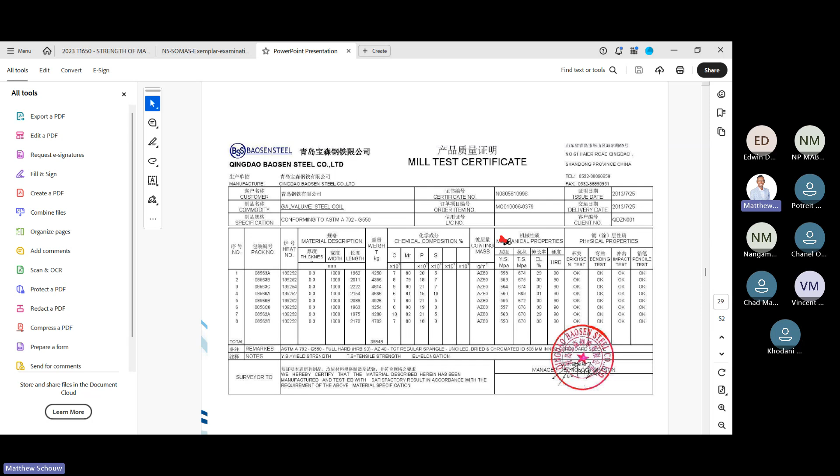So I'm just gonna quickly start off with shear, and then we're gonna commence with the tensile testing, which is a big section — a lot of free marks. So again, shear — I didn't mention to you what it is.

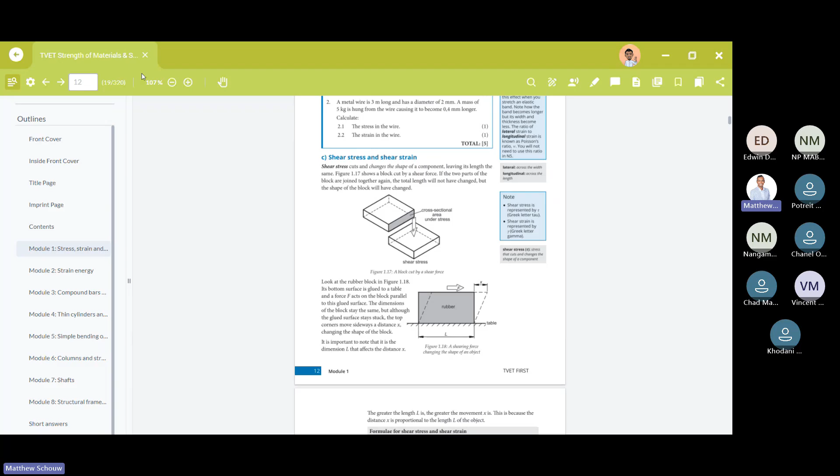It's like tearing a page, where we have a parallel force. And guys, what is the most important part? In your direct stress, you're looking at the area perpendicular, right? But in this case, you're looking at the area parallel to the force applied. Okay, that's very important with shear.

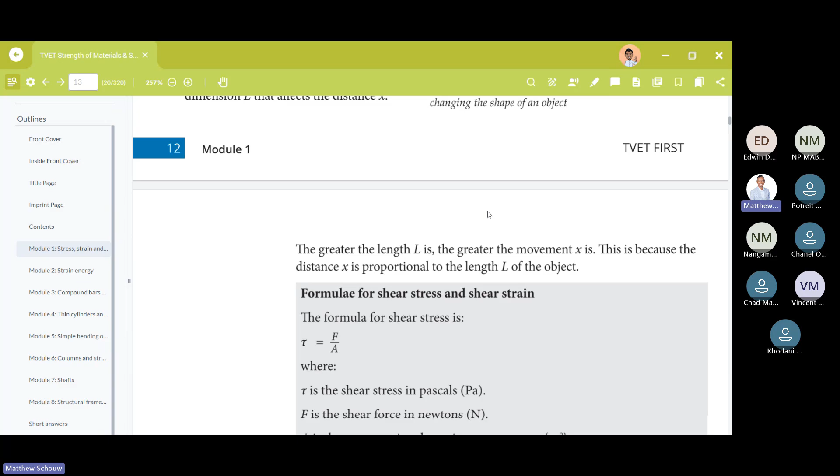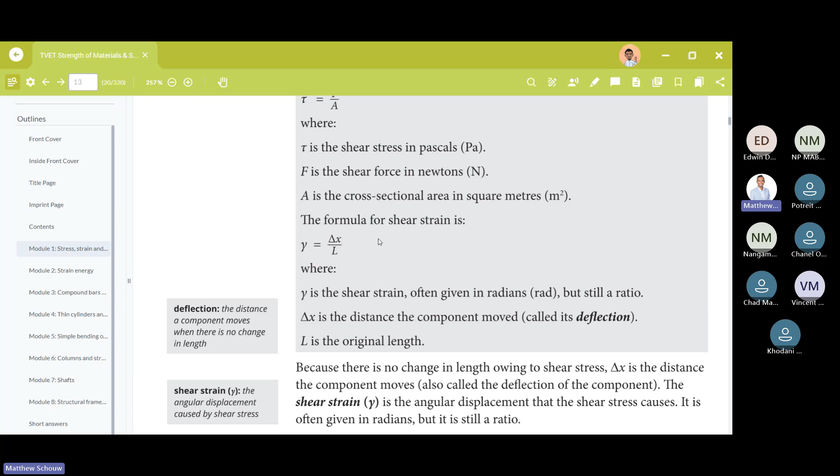This doesn't really come up a lot in the test, however it does come, right? It has exactly a similar relationship to the previous one, but instead of using sigma, we use tau for the shear stress — that fancy T, force over area. And then we also have our shear strain as well. Again, if you divide your shear stress by your shear strain, you get something called the shear modulus, or modulus of rigidity, which is a similar property to your elastic modulus.

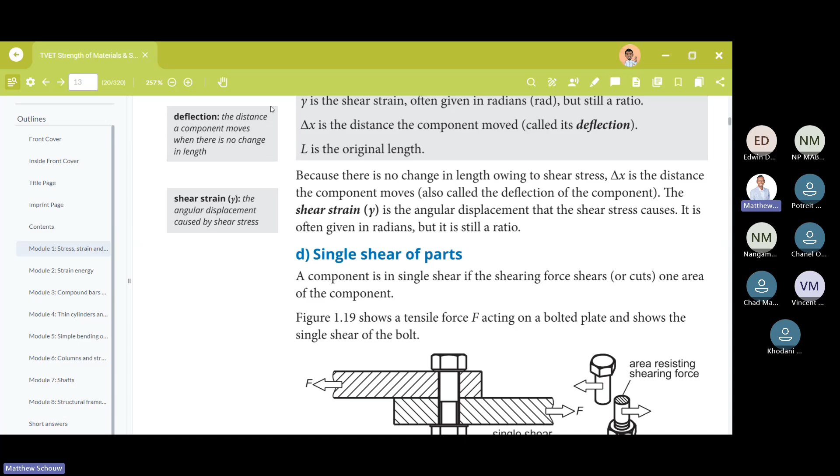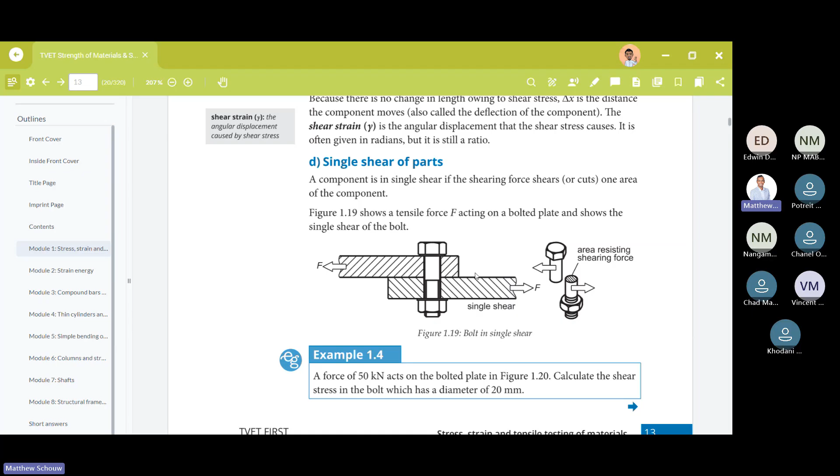Let's quickly look at an illustration of shear, since this tends to happen a lot. Let's look at example 1.4. I'll read the example, point to the sketch, then we'll solve it. It states we have a force of 50 kilonewtons acting on a bolted plate in figure 1.20, essentially the same as this one, which looks like a rivet. It asks you to calculate the shear stress in the bolt with a diameter of 20 millimeters.

So I'm just going to quickly prepare my whiteboard, warm up with these questions, and then we'll begin with the stuff in question.

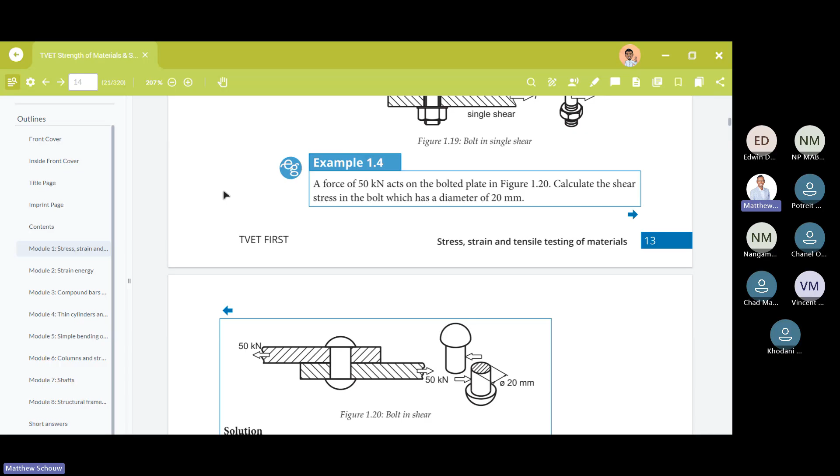So guys, I want to be clear: when it's shear, you use the area parallel to the force, whereas for direct stress, you use the area perpendicular. Very important. Let me paste the question. Please, I want to explain so you don't get confused between perpendicular and parallel.

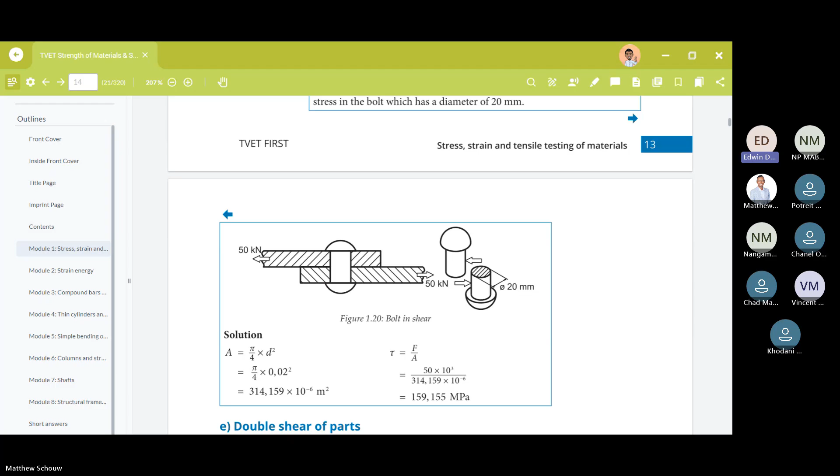So when I say it, what do you think I mean? Explain it to me. For parallel, I think of my back against the wall - parallel with the wall. Perpendicular would be at 90 degrees, like the floor I'm standing on. So my question is, when is it perpendicular or parallel? Is it when the force is being pulled in a certain direction, or how does it work? Yes, that's what I'm trying to say, that's where I get confused.

So when we're talking about direct stress - force over area - you know this, right? Shear stress and direct stress are not the same thing. With direct stress we have either tensile or compressive. I'm explaining the concept here before we get on. Is that fine with everyone? You understand what these two are, right?

You can say yes, Edwin. Tensile and compressive, right? When you're dealing with direct stress, you use the area perpendicular in this case. Are you with me? In this other case, that's shear, and you use the area parallel. Are you with me now? You see the difference in the areas?

Yes. So let me explain - if I had a setup like this, and the loading was like this, ignore this question for now. This area over here is parallel to this force. Can you see? This round section over here, what they're mentioning - you see that? So we'll use this area, pi over 4 d squared.

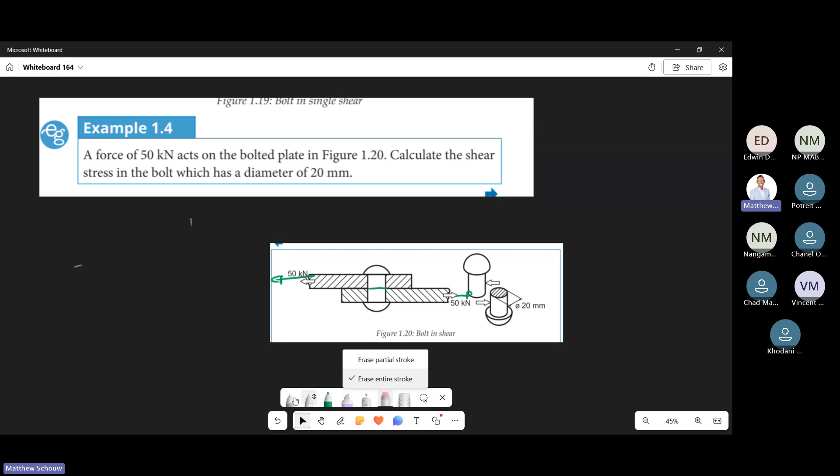So guys, just a quick one - we'll talk about the others now. They ask us to compute the shear stress. We know shear equals force over area - I normally know it as V over A, but you can call it F over A. We know it's 50 kilonewtons. I can show you so much on this, but there's not enough time to show where it all fits in. So it's pi over 4, and again the reason we use pi over 4 d squared is because that area is parallel to that - it's essentially breaking. So that'll be 0.02 squared, and you'll get our answer.

Okay, just a warm up, eh? We're not getting to the meat and the bones - the meat and the potatoes, sorry. Can we all just quickly work that out? What is that answer? Just a warm up. Some people are rusty.

So now what did you get there? Oh, Vincent?

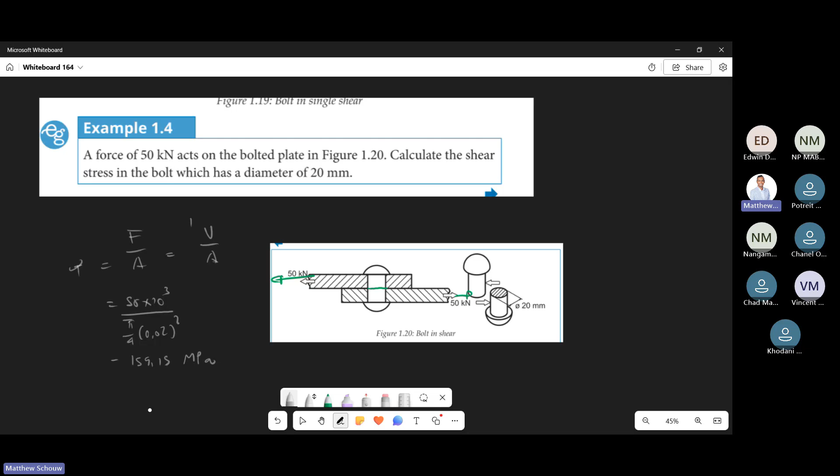Just a warm-up problem. Again, what's important here is the area, right? You'll see as you move along these problems where this is important. Okay, I hope everyone got that.

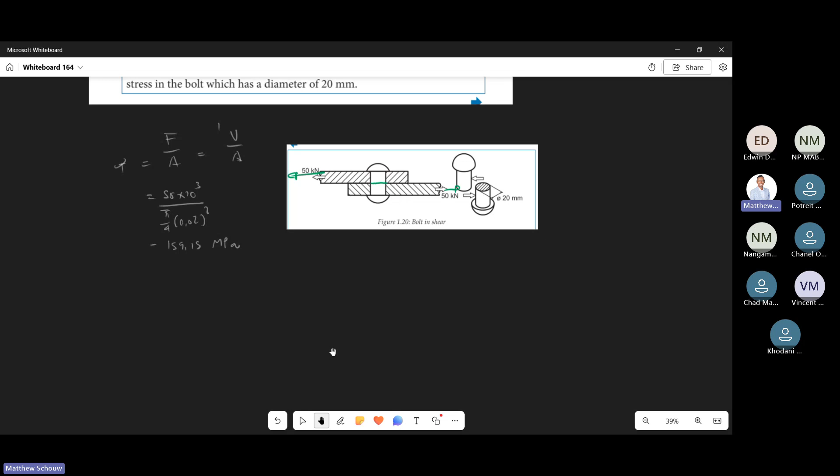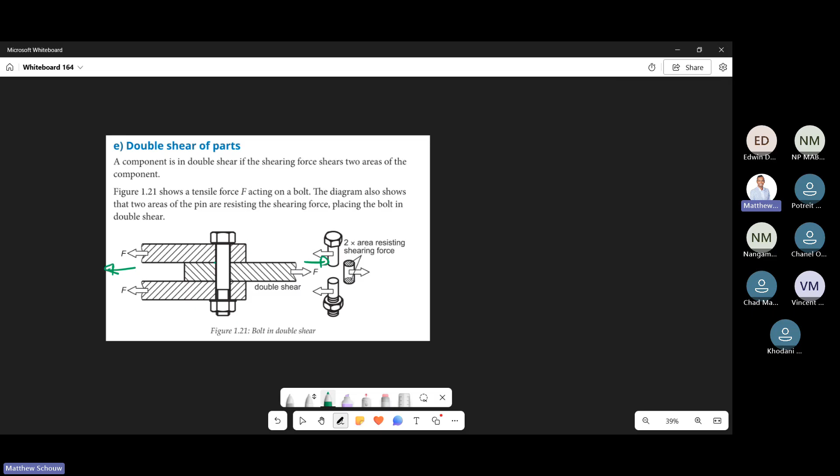So I wanted to quickly go on to the concept of double shear now. So that was single shear, meaning it broke in one area, and now we move on to double shear. Double shear is basically all the same stuff, but in this scenario what's important is that it's shearing at two different sections. So here we've got one force, or essentially two forces being applied that way, and another force being applied that way, and it's going to shear over here and shear over there.

What we essentially do is just take the area and times it by the number of areas it breaks. This is a lot different from when you're doing a tensile test, where you don't multiply the area by the number it breaks. This doesn't happen frequently, but it's worthwhile sharing.

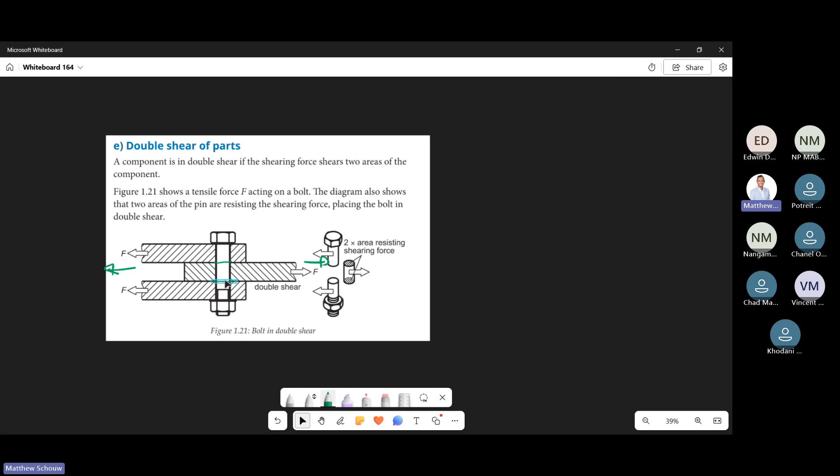So in this case, it breaks over here, and it breaks over there. So therefore, it's going to be 2 times the area. So let me pull up another problem quickly using a knuckle joint.

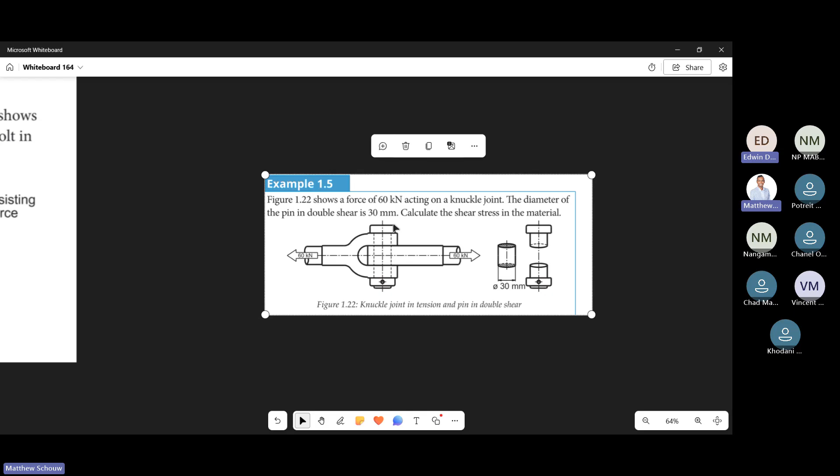Does anyone know what a knuckle joint is? No one? Sorry, apologies, I would ask a lot of questions. So area is times 2, is that what you're saying?

Yes, for double shear. For instance, the questions don't tell you directly, right? So they give you something like this: you apply the 60 kilonewton load, and they'll ask you to calculate the shear stress of the material. Now, if you're inexperienced, you probably just take the one area.

So first of all, you check your force. That's two forces going that way. And if that's going to break, they normally state that the pin is in double shear anyway, so it gives you a hint to what's happening. But if that breaks, it'll break over there, and it'll break over there. Hence it's in double shear.

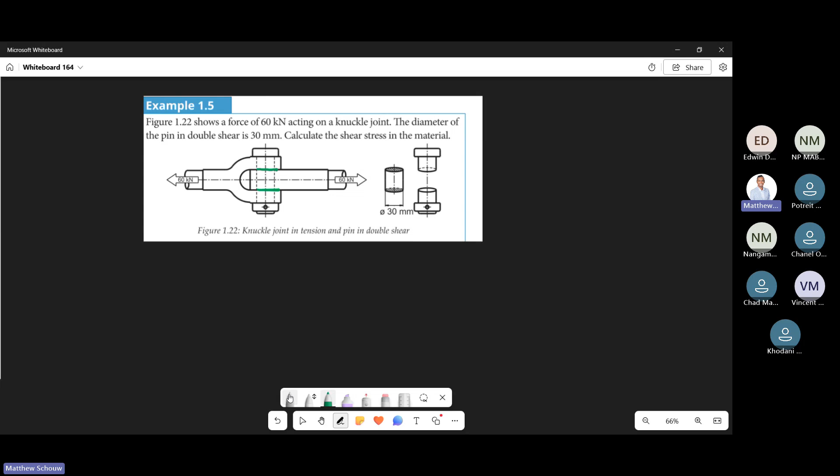So therefore it's the same thing, but 2 times now in terms of the area. So you go shear equals force over area, times 2. So in this case, it's 60 kilonewtons, and then you're basically going to say 2 times pi over 4. Again, these are very elementary problems.

Times 0.03 squared. And then you basically find the shear stress of this particular joint, so when you're designing, you know which kind of material to use. It must be within that limit.

Anyway, so there should be a quick calculation. Can you guys quickly do it? Shear, there's a whole big thing on shear, by the way. It's just that it's not the core focus of this particular course, you know what I mean? I can show you where it's very important, but it's just not the core focus here.

So again, for double shear, the concept is just to be cognizant of those things. 42.4, 100%, yeah, that's perfectly fine. That's the shear stress in the joint. 42.4 MPa. Okay, cool, that's perfectly fine. That's the shear stress which it's going to experience.

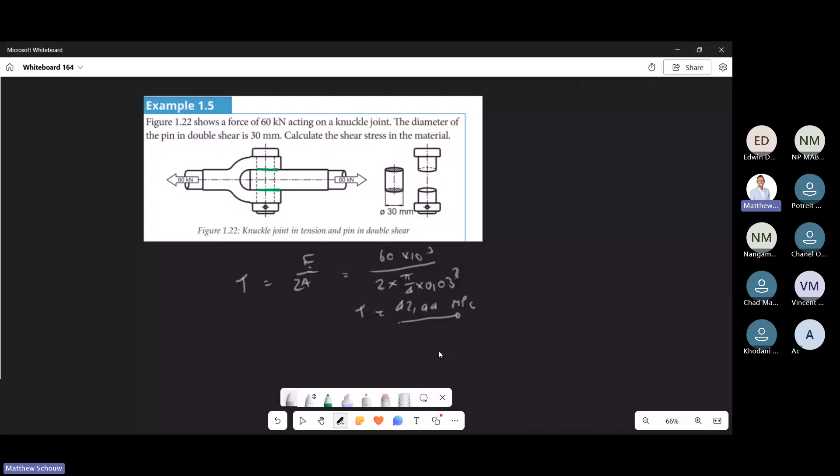Yeah, you know, I can explain that particular thing. But that's enough for shear. Just the key point: area parallel, right? Okay, so I'm gonna move along. So now I want to come up to testing of materials. Now that's what I want to do. Okay.

Yeah. So unfortunately for you, I've done this. I've worked with this at a company called Gascon. We built pressure vessels, and I tested a shit ton of materials. Excuse my lack of language for the better word.

Anyway, so what we have with the tensile test. I'm not sure if anyone has seen this before. Has anyone seen this before? Tensile test. Who has any experience with tensile test or tensile property? So now, Vincent, Edwin. Nothing my side. Nothing your side? Okay, okay. Anyone?

There's actually a lab called 180 degrees, which actually does this. They do this type of testing. Anyone? Hey, man. No one. Okay, right. So what happens here?

Okay. So I do recommend watching the video. I'm sharing my slides again. And then there's two videos I sent you explaining this. And I can send you a video of what an actual tensile test looks like. So nevertheless, tensile test, what we typically have, let's see what it looks like.

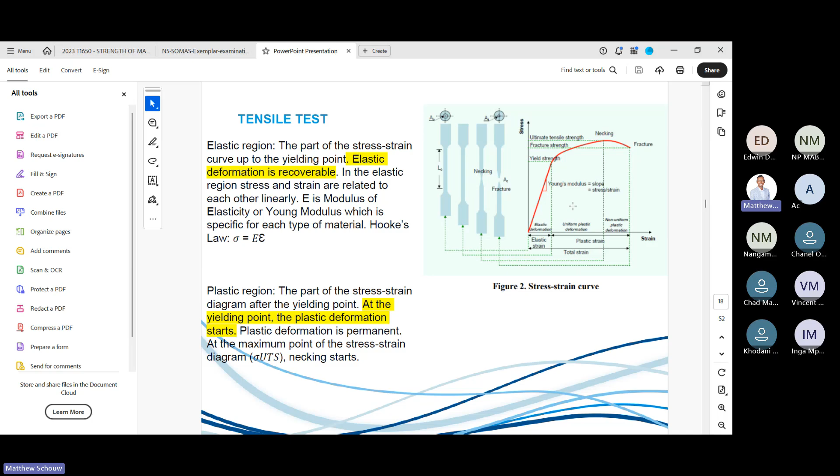Again, elastic deformation means whatever load is here, it can return to its original shape. Any load above that, which is essentially the plastic part, it cannot return. So this is what a typical tensile test or tensile graph looks like.

Talking about the elastic modulus, I did mention I'll get back to this. So just reading off here, it states that the elastic modulus, E, is a measure of the stiffness of a material determined by the slope of the straight-line portion of the stress and strain curve, as I mentioned to you. So again, the elastic modulus is essentially, quote unquote, the stiffness of a material.

So what they say there, a material having a steeper slope on the stress and strain curve will be stiffer and will deform less under load. And where it's less steep, it will be less stiff. So for instance, if you look at steel, that's why we actually use steel, because it's more stiff. It can elastically deform as compared to the other types of material.

And what they're saying here, it can be seen that if two otherwise identical parts are made of steel and aluminium respectively, the aluminium part would deform about 3 times as much as the steel, even though subjected to the same load. So that's what your E value actually is, your elastic modulus.

All right, and then just to end off we'll come back to this. So, who's coming in and out? Okay, go back to this. Just want to show you some stuff.

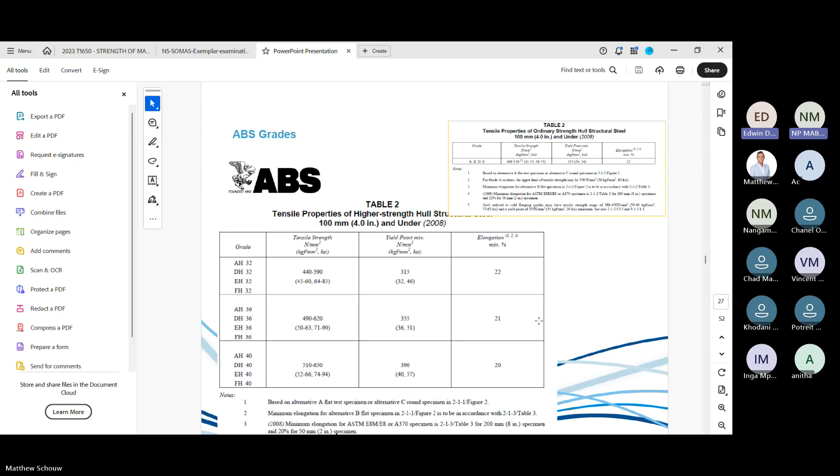Is everyone still following me? Yes, sir. Okay, thanks, man. I'm talking a lot here. Following. Okay, thanks.

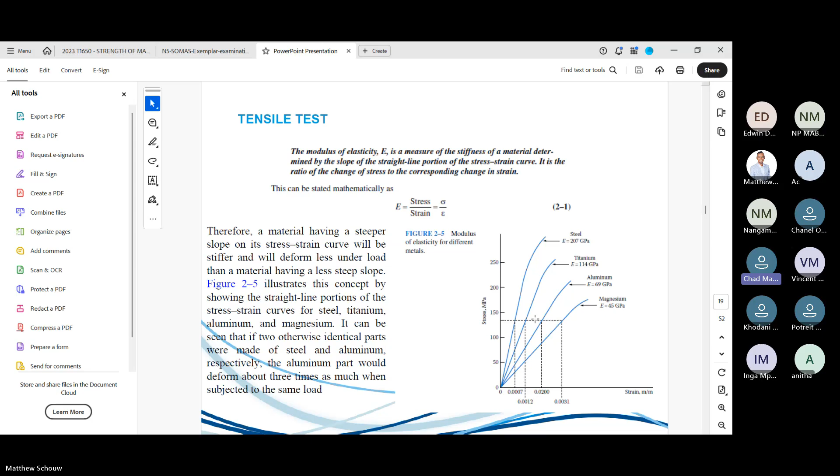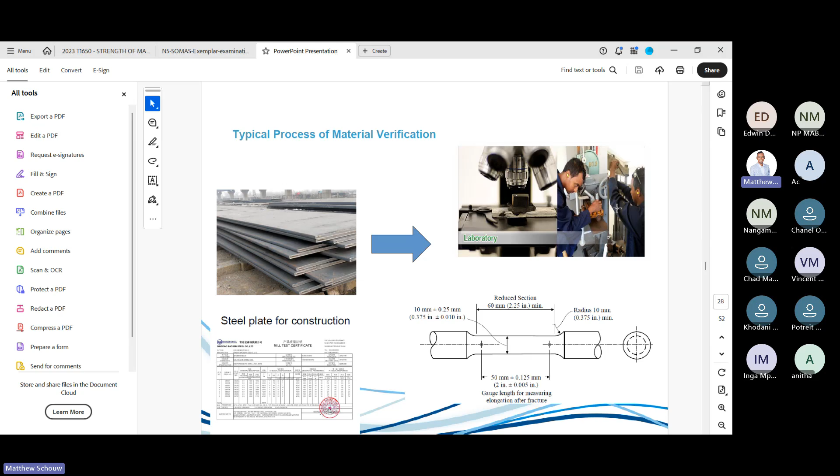So that's me. It's a bit of an old-school machine. You clamp it, and then it just runs, and it generates this graph for you in real time, this graph which I mentioned to you over here. So you actually see the graph go. I was using old graph paper with a pencil at that machine. There are a lot of more modern machines.

And I was working with the machinists, the guys doing welding. But anyway, I can talk about this for legit 4 hours.

But anyway, based on this graph, we need to determine certain values. Inga, yes.

The hand was up, eh? Not sure if you... Okay. Can you hear me now? Yes, I can hear you, Chief. Loud and clear. Hello? Yeah, I can hear you.

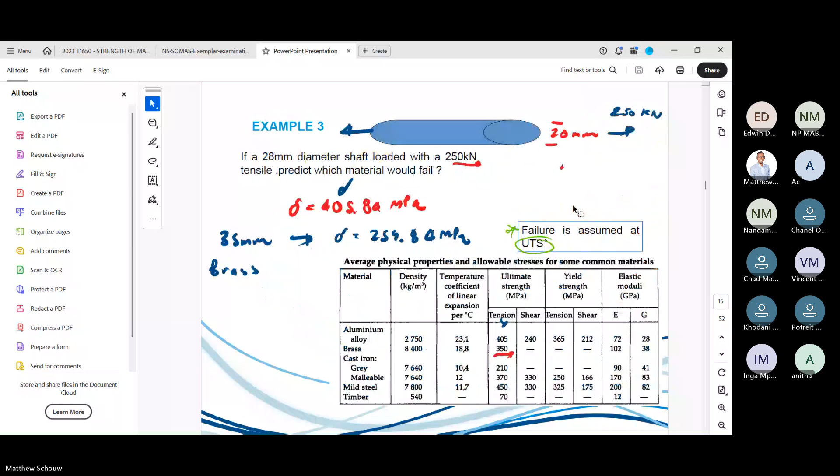So on this graph here, we must now calculate certain stresses along the graph. So basically, there are a few stresses. Let me use your N5 textbooks rather, just for uniformity purposes. And this is what I legit did. I first thought I'd never get a chance to actually do it, but I somehow ended up in that field where it was just an Excel spreadsheet. I was doing it most of the time because you just had to program it, write the formulas out once.

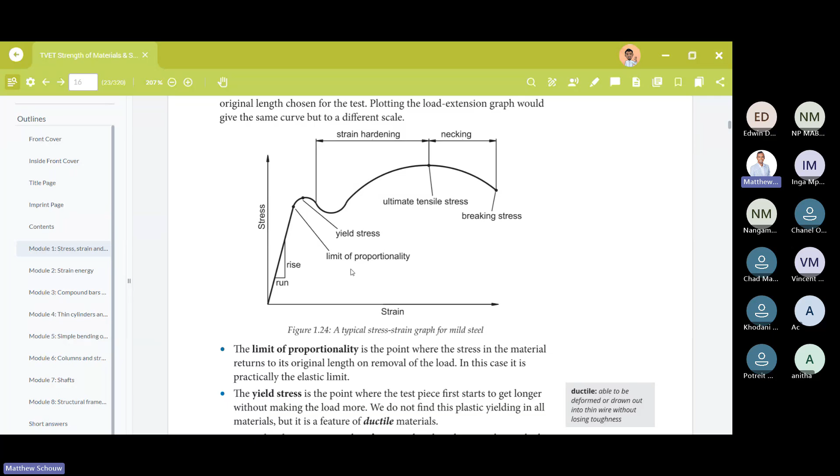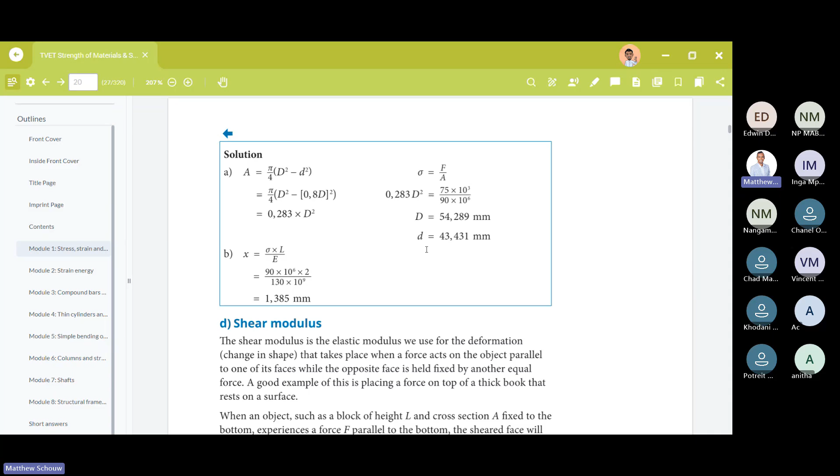Okay, so this is what it looks like again. This is exactly it. I think some of the books require you to understand each individual part, so I'm sure you guys can go over that. And then I want us to look at a few parameters on this thing. I don't particularly like the way they've structured it here. Okay, so let me just go back to my thing rather. It's just gonna be easier. It's all the same really.

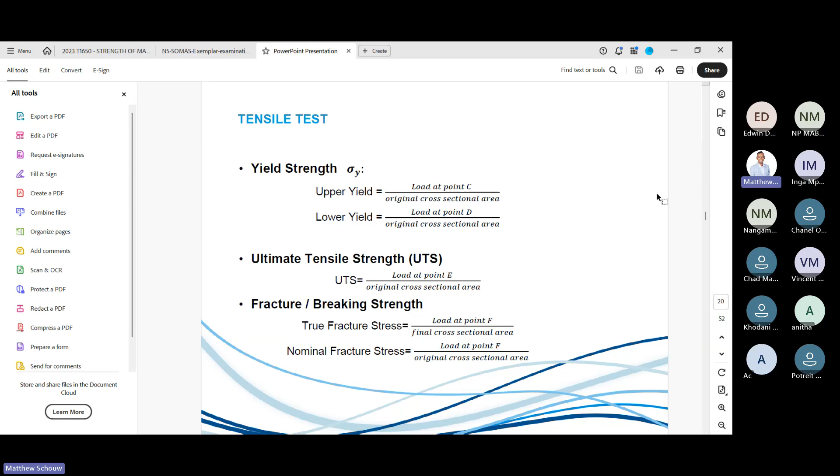So using that graph, to find your yield strength, sometimes it's an upper or lower yield. Typically, they'll give you a value. And then you just take the load divided by the area. It's all force over area. For your UTS, you take the load at point E, which was that maximum load Inga was talking about, and divide that by area. Don't worry, we'll be doing 2 examples of this. We look at the percentage elongation. This is a very important metric. It's just like the strain.

So I'll have a specimen like this. I'll put up 2 gauge marks using a center punch and a hammer, right? Vernier, make 2 marks on the one side, center punch, and then I put that in the machine, it breaks, and afterwards I put it back together and measure the length. So L0 would typically be 50 mil. And afterwards it'll be LF, the final length. So I take the final length minus the initial length, which is the change in length, divided by L0, the original length, times 100, to get the percentage elongation. It's just like the strain.

And then you have a percentage reduction of area. This parameter is important, especially for through thickness. If you have a very thick plate, we typically use this. In this case, we measure the area before at that point, and then measure the area afterwards. That's A1 minus A2, divided by the initial area, times 100, and you get it in percent. But you can also just remove all the pi over 4s, because that's common. You have D1 squared minus D2 squared, which is initial minus final, divided by initial squared, times 100.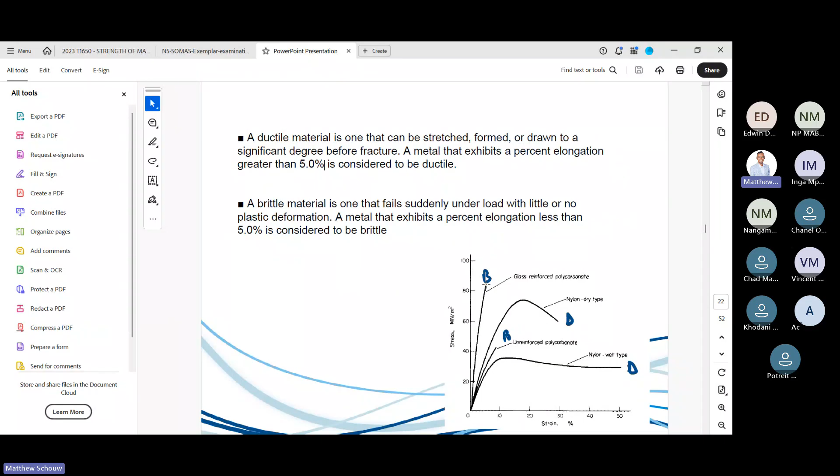A brittle material suddenly fails under load. You load it up, it doesn't deform, it immediately breaks once it reaches UTS. So there's no yield point, it just completely fractures. For a layman, with a ductile material, when the structure collapses, we have time to scream before it breaks. Whereas brittle, it loads up, breaks immediately, there's no time to scream, you're basically dead. So I hope you get the difference. And what these parameters do is quantify it. They tell you how much ductility there is.

All right. So without further ado, let's solve our first tensile test question. So this one, should I use the book? I have questions prepared. I'm sure you saw the Google Classroom over there.

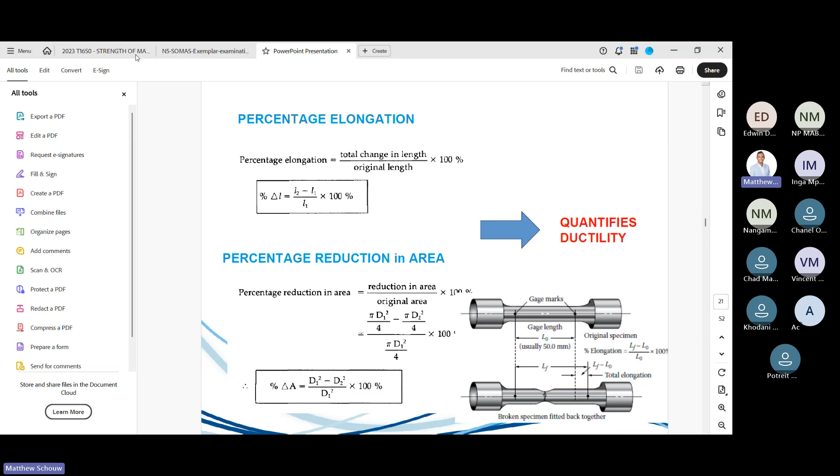I want to use, okay, let me use that one over there. You should find it there. Just get the thing quickly. And we're going to be basically doing two of these questions over here. And guys, for your upcoming test, ensure you are able to do this without fail.

So session 2, okay? Session 2. Okay, cool. Just close this on session 1. Yeah. Over here, okay. Okay, so this is from the Wickens textbook. Make sure you do this. It's a very popular question in the

past papers. Share, please. Yeah, I'm sharing it now. Yeah, sorry, dude. I just couldn't see your screen. Okay, now I'm still sharing.

Okay, so here we go. So we're gonna do two of these. One I'm gonna talk mostly through, and then the other one I want you guys to do. Okay. I think I might just pull up a random past paper while you guys are busy with this. So here we have. So the test has been done, right? And we have all of the information, the data.

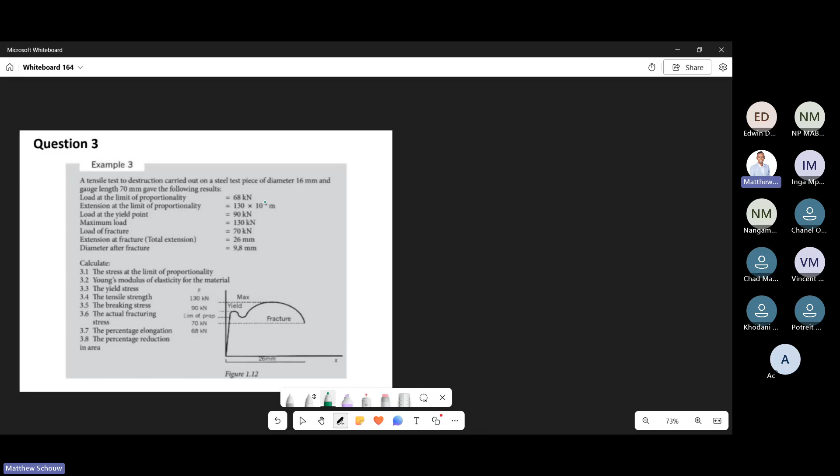So it says a tensile test to destruction carried out on a steel test piece of diameter 16 millimeters and a gauge length of 70 millimeters gave the following results. Key point here, initial conditions are given here, right? 16 mil, and then your 70 mil. Okay. The load at proportionality is 68 kilonewtons. So remember, that's all over here.

Your load at your yield point, which is just on there, right? Your maximum load, 130, which is there. Load at fracture, it's over there. And your extension at fracture, that's the total length after it's been broken. So basically that's extension. And then you have your diameter after fracture. So it is reduced from 16 to 9.8. So these are the following things asked for.

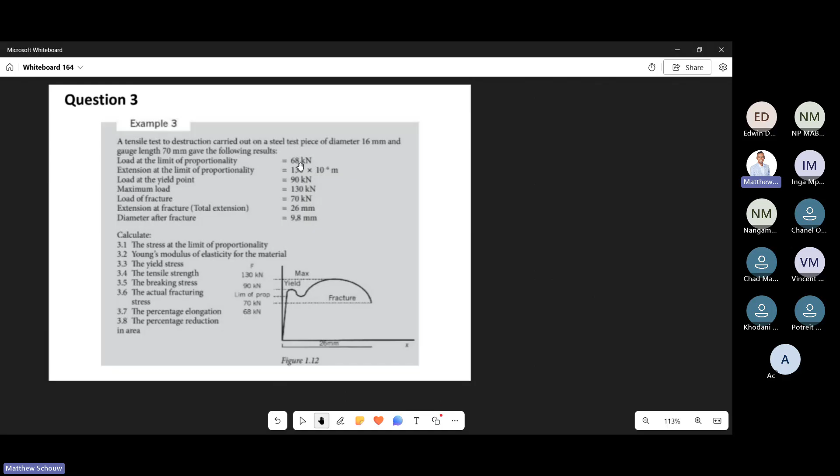Okay. So they're all basically the same formulas, but you must just know which values to use based on the text given. So 3.1 says the stress at the limit of proportionality, which is this limit over here, right? And remember, this is where we find our elastic modulus. So we take our load at the limit of proportionality, which is 68, and divide by the initial area. So let's quickly do that.

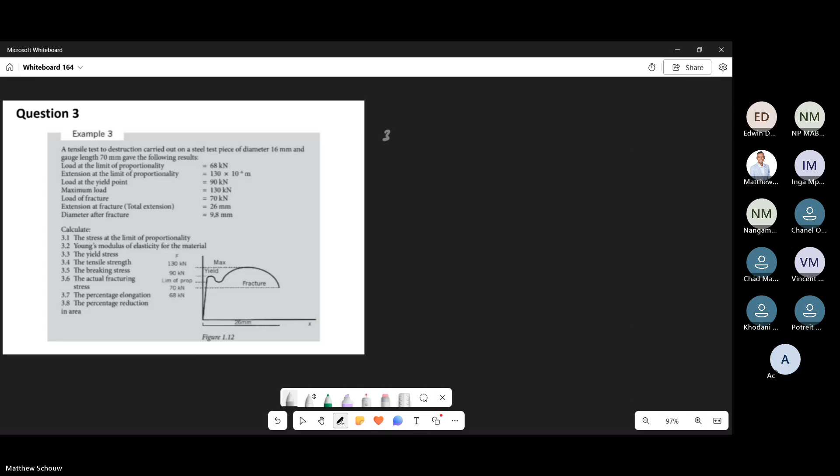It's all force over area calculations. So you can just call it stress, force over area. Maybe you can call it subscript LP for limit of proportionality. The force is 68. Okay. And our area is given as pi over 4 times 0.016 squared. Key, make sure you use the initial area for this, right? Can we just quickly get that value? Yeah.

Got the book in front of me so I can easily just quickly check. Okay, let's quickly see. Yeah. I got 338.2 MPa. Perfect. 338.2 megapascals. That's definitely correct. So that's again at the limit of proportionality, right? That's basically over there. Colleagues, do we all agree with that? Inga, Vincent? Let me know.

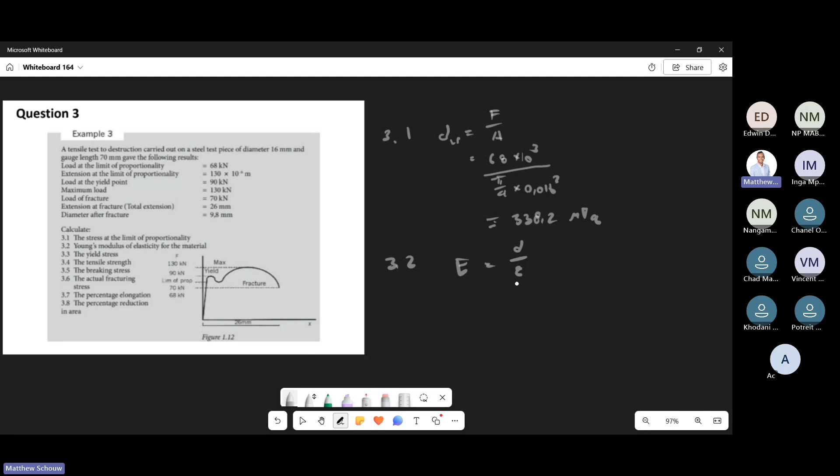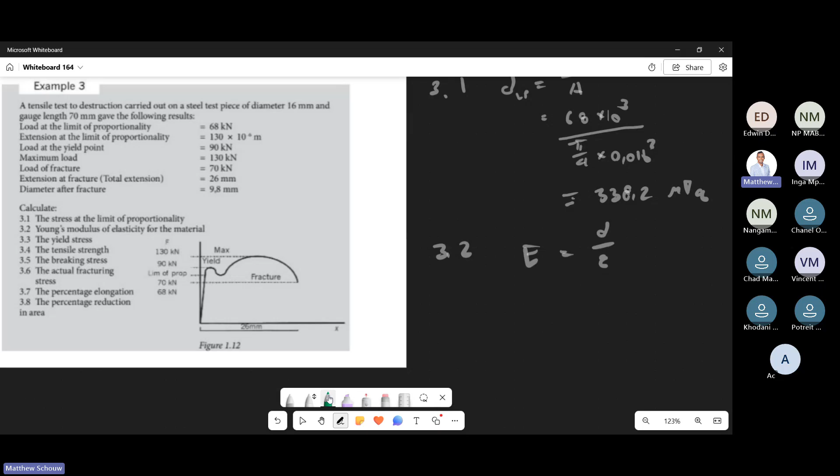So at 3.2, we have to calculate the Young's modulus now, right? So now, you guys recall the Young's modulus was stress over strain, right? Okay. Are we happy with that? So what is key here is that you want to be working within this region over here. Remember, it's the slope of that line. Obviously, it's a bit skew here. But we basically use the value at the limit of proportionality because it's within that region.

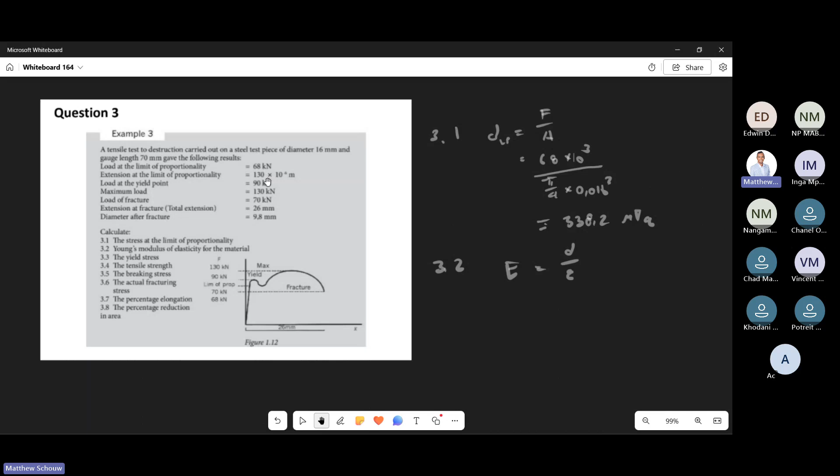But we need to calculate the strain, right? The extension. So they give you an extension at the limit of proportionality, which is 130 times 10 to the power negative 6. So if you remember what strain was, I think Edwin did ask about this. So strain is x over L. Now extension is given as 130 times 10 to the power negative 6. It's very small initially, remember.

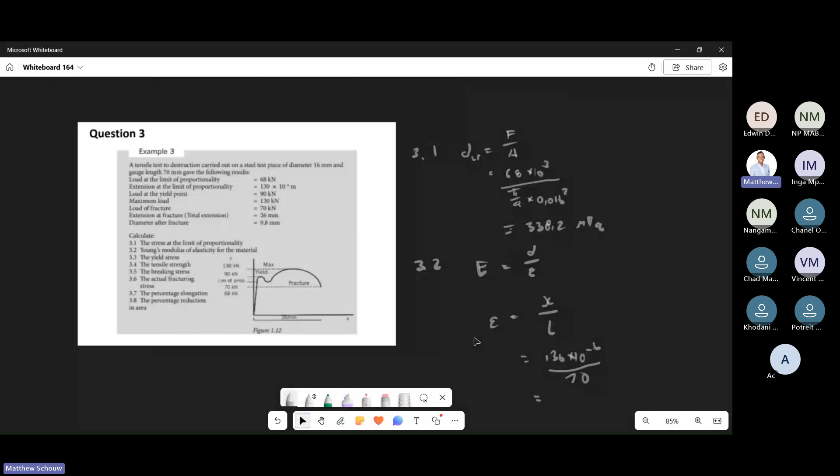I'm dividing that by the length, and the original length was given as 70. That's the original gauge length. That's the punch marks I was talking about. So we divide that by 70 and we get a corresponding strain. And just quickly get the strain value.

So sorry, quickly, it's just not very clear. Is that 130 times 10 meters, no? Meters? Yes. Is my writing not clear? The length in meters there, times 10 to the minus 3. Oh, I see. Okay, I'm with you. Yeah, so that's in meters. This must also be meters at the bottom, right? So that's going to be 0.07. Thank you for picking it up. You can either keep it both in millimeters or meters. Yeah, thanks for that.

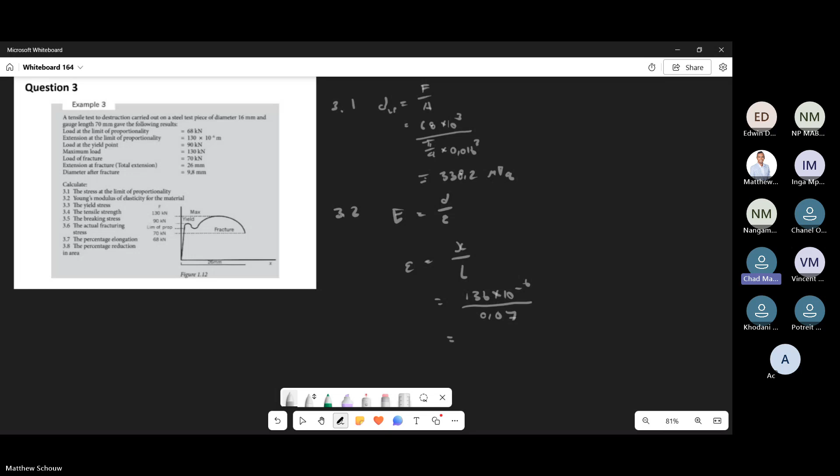Let's get that strain quickly. Okay. About 1.857 times 10 to the minus 3, right? Dimensionless, that's perfect. But remember, we must calculate the elastic modulus, which is the stress over the strain. So you're basically using the same stress. We'll just call it LP again, divided by the strain now. It's all in the limit of proportionality if you want.

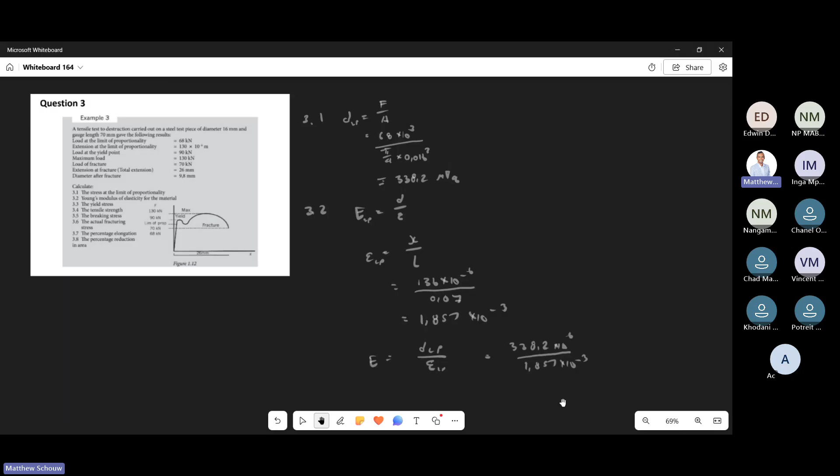So that'll be 338.2 times 10 to the power 6, and we divide that by 1.857 times 10 to the power negative 3. You tend to find your E is always around 200 odd because you're typically working with steel, around 190 to 210. That's quite common. If you're not getting that value, you can nearly assume you're not in the right place. Not always, but typically.

Let's quickly get the elastic modulus, and that should be in GPa. What did you get? 182.121. So this is not necessarily steel, but close. 182.121 GPa. Perfect. So elastic modulus is always in gigapascals. So you've got that value, the so-called degree of stiffness, as they say.

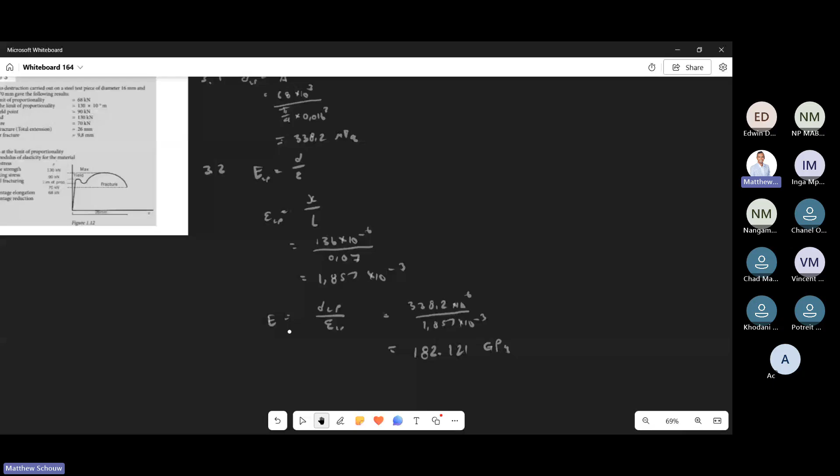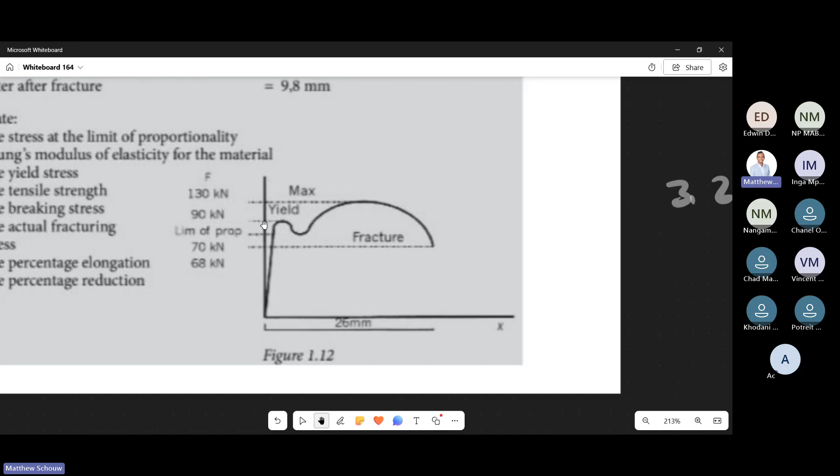So that's 3.2. Let's quickly do 3.3, that's the yield. Now, guys, the yield is basically where that bump is. The yield is the last value within the elastic region. Any load or stress greater than the yield, it'll be plastically deformed. That means it cannot return to its original shape. Let me just move that to the side.

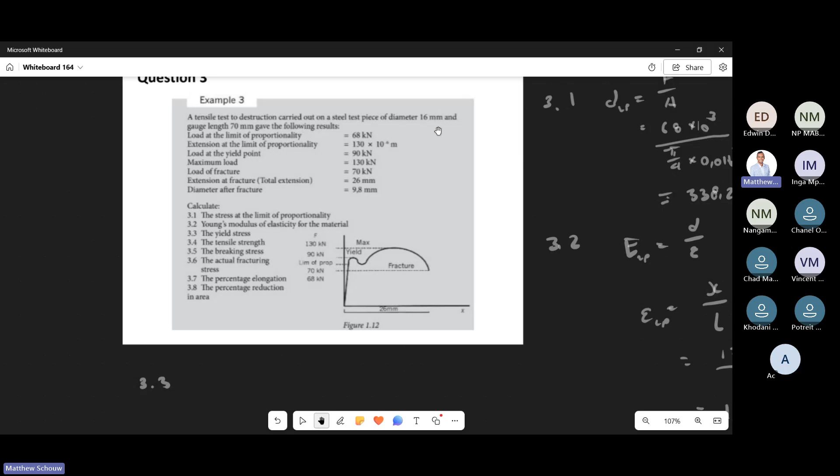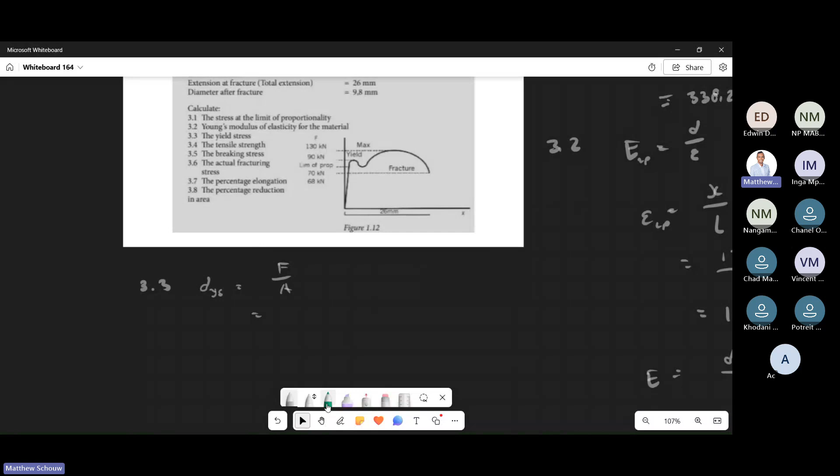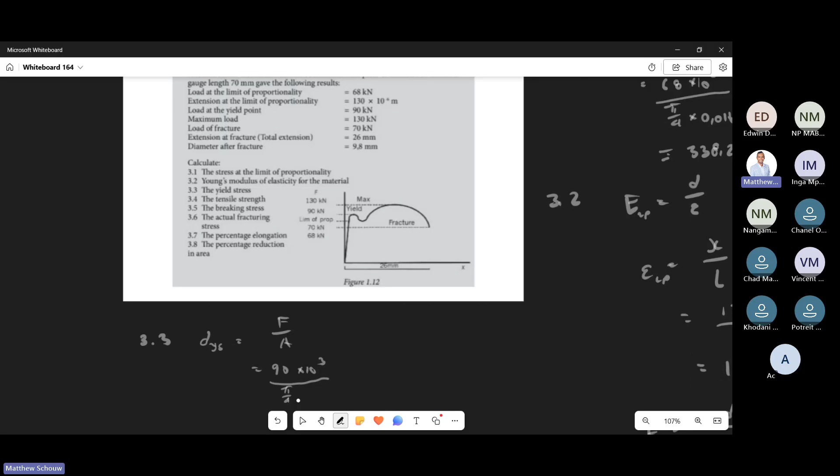So 3.3. I'm not sure the Vickers textbook has the same example in the latest one. The yield value is typically given: 90 kilonewtons. Can we all see it there? We again just divide it by the original area, and call it sigma ys. That's force over area. Our force at the yield was 90 kilonewtons, and we divide by exactly the same area, 0.016. So it's the same force over area calculation the whole time, basically.

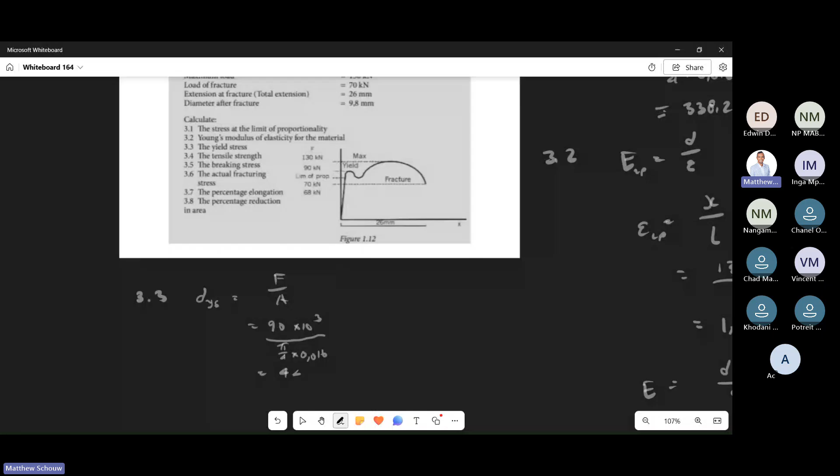I got 716 MPa. That's a big number, a really big yield. Let's confirm. It's 447.62. Yes, there we go, I did it wrong. 447.62 megapascals. That seems really realistic as well.

So 3.4 should rather have been worded the ultimate tensile strength. You guys quickly do this for me. That's the max value, right? The maximum load it can take is 130 kilonewtons. So once again, you divide by the original area. That's the maximum load on that certificate I was showing you. Here we found the yield stress, and now we find the UTS. Quickly work it out for me.

Guys, got it? Sorry, sir, I got distracted. So this is once again your force over area. It's all force over area, but now it's at the maximum. The tensile strength should rather have been worded the ultimate tensile strength. That's the UTS. All right, next.

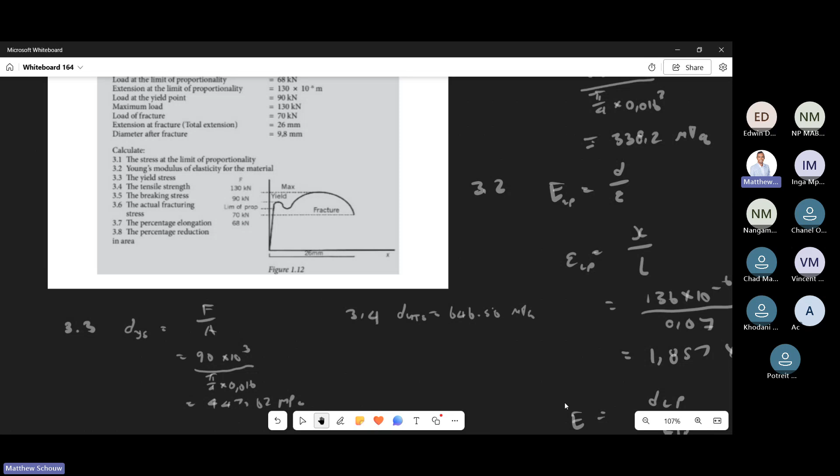Again, I just want to quickly screenshot that so you can see what I'm talking about. On the report, I'm just going to show you that value. Can you see there? That's the UTS over there, and that's your yield. We're still working out the elongation.

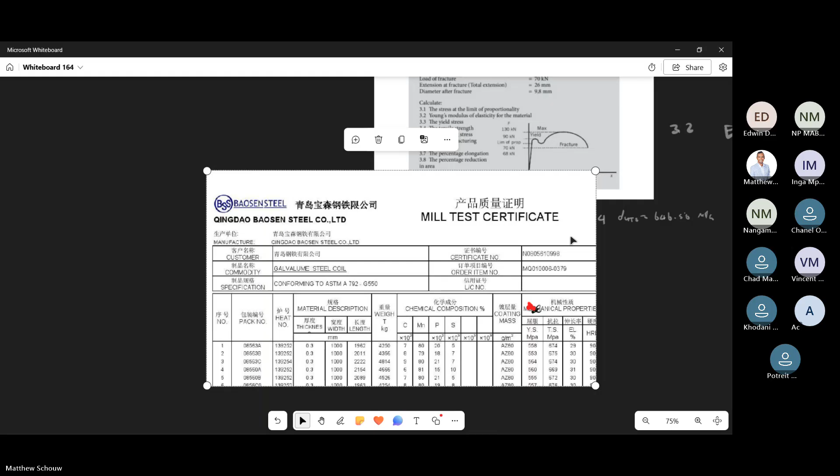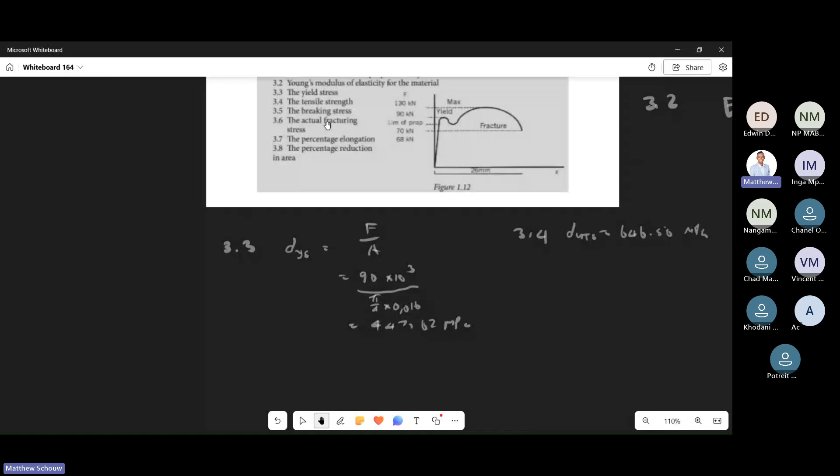Okay, so now let's work out the rest. There are two other values: the breaking stress and the actual fracturing stress. These aren't typically reported values, but let's look at the load at fracture - when it's broken. The breaking or fracturing stress would be the load at that point, 70 kilonewtons, divided by that area. The actual fracturing stress uses the actual cross-sectional area where it broke, which in this case is 9.8.

I'll quickly do that here - 3.5, we can just call it fracturing stress. Just remember the difference between the actual fracturing stress and the regular one - these aren't typically reported, but they do have reasons for existing. We typically work with those values though. So it was 70 kilonewtons, still the load at fracture as given. We divide it by the area - it should have been squared, sorry - pi over 4 times 0.016 squared.

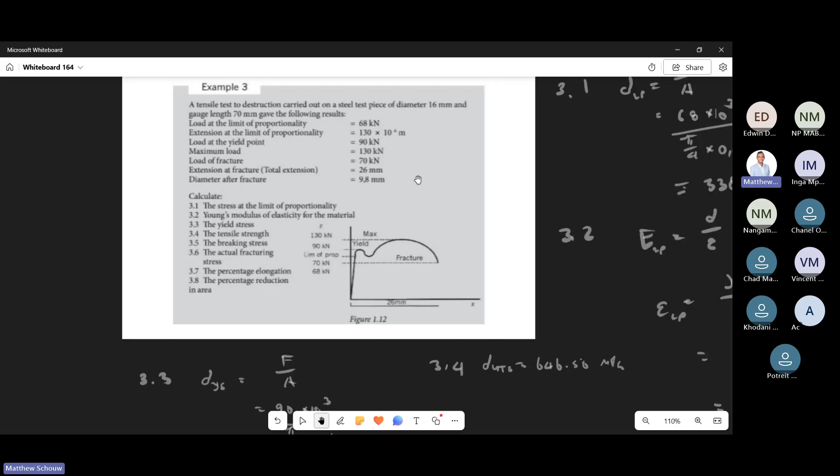We get that value. Now for the actual fracture, that's the area at breaking. Let's call it FA or AF if you want - also force over area. The force at fracture is still 70, but now you use the actual area at that particular point, which is 9.8 millimeters. Remember, you've been working with 16 mil all along, but now you need to use 9.8 millimeters. So that's pi over 4 times 0.0098 squared, or 9.8 times 10 to negative 3 squared, depending how you want to put it.

Let's quickly get those values - one is the fracturing stress and the other is the actual fracture. I'm not sure if I have the Vickens textbook here... yeah, I do see it here.

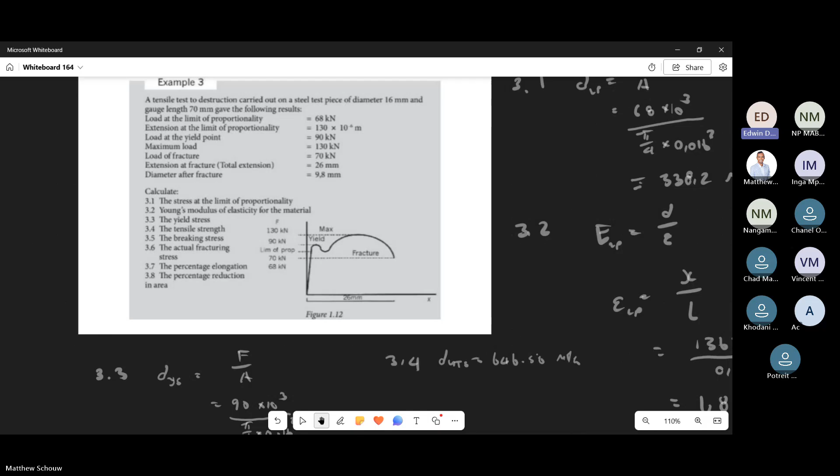Is that because it's stretched? Yes, so now your... it's not length, it's area. Yeah, for the actual fracture the area got thinner. I got you - it's stretching like a piece of... yes, or something, the longer you stretch it, the thinner it gets. Okay, correct, I got you.

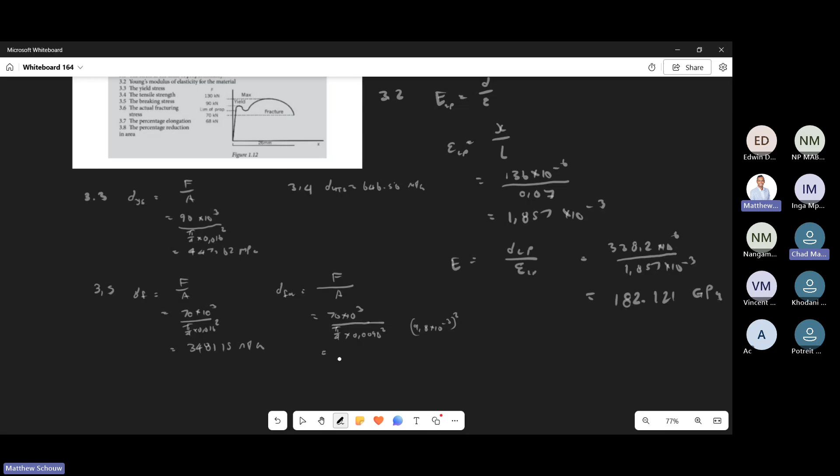Yeah, there we go - so for this one you should have gotten 348.15. Basically that's the load at the point of breaking - remember, it's not the maximum load it actually takes, that's where it broke. Then your actual fracturing stress, if you got it, will be a very high value - 928.

I'll come back to these values now. Just, can you all see it's all force over area, right? All the same.

Okay, hold on, sorry, apologies. So yeah, we are now at your breaking stress and actual fracturing stress - that's 3.5 and 3.6.

You will just send me what the Vickens textbook looks like. I think I did - there's a scanned copy or whatever. That's what we're at now. Share if someone has a scanned copy. Yeah, not the whole thing, just the first chapter. Yeah, I got that one.

Okay, so are we happy with these values? Everyone get it? You just have to know what is what, basically - that's the essentially important part here.

Come back to, or come back to afterwards regarding the factor of safety. Yeah, okay.

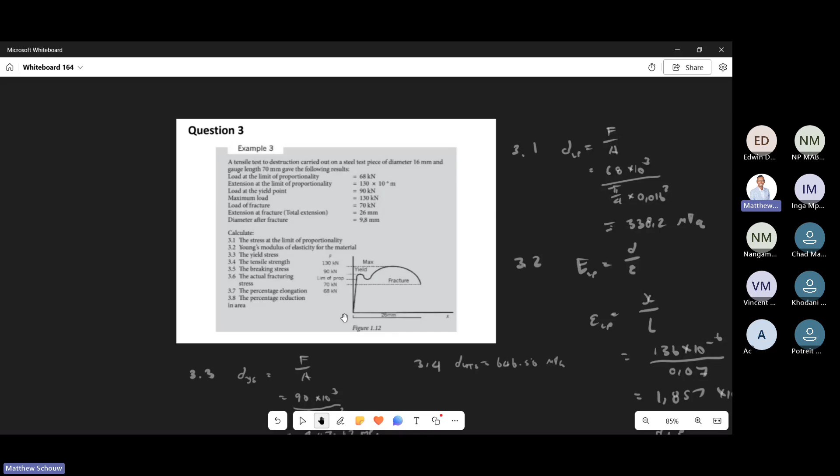For that one, your percentage elongation is just like your strain, fairly easy, and remember, this measures ductility. I'll do it with you guys. So again, we're looking at the extension, the total extension of the whole thing. In this case, it was 26 millimeters. It extended that much.

So we take that extension and divide it by the 70, right? It's quite easy, we just work in millimeters for percentage elongation. I think they call it X. It's 26 divided by 70, and the only difference is we times it by 100 now. You get an answer.

And your reduction in area, percent in area, will be D initial squared minus D final squared divided by D initial squared. It's initial is always at the bottom. And if you recall, instead of area, we can just use diameter because the pi over 4's cancel out.

So that's the final, subscript O is initial, but anyway, I'll go to the book here. In this case, that's a quick value, I think we all can calculate that. You get around 37.14, and I'll deem this a ductile material. That's quite easy to do.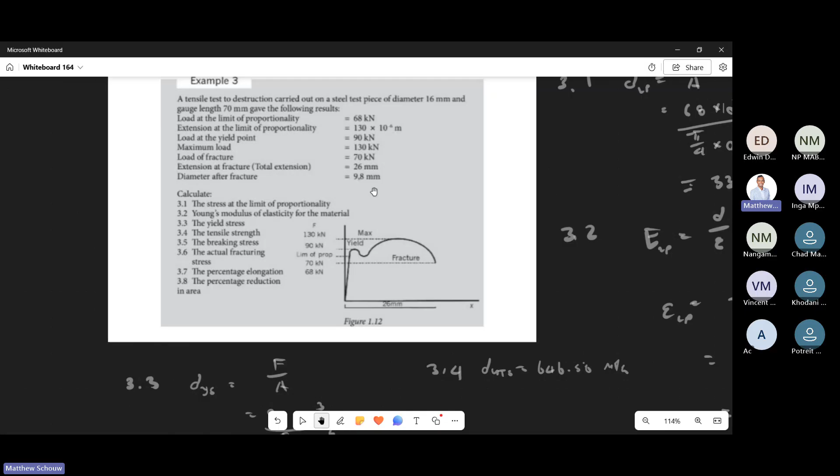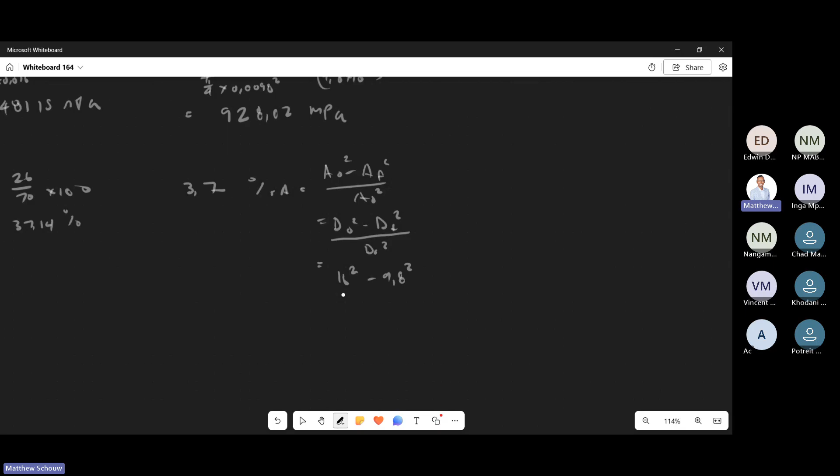For this one, we just take the diameter before and after. So initially we had a 16 mil, and once we put it back together, we measure the diameter, it'll be 9.8 mil. So in this case, it's just going to be 16 squared minus 9.8 squared, dividing it by 16 squared. You can just quickly work it out for me.

Yeah. And we can get our percentage reduction in area, times by 100.

Sorry, I'm not understanding your handwriting, what is A what and AF, what are you writing there? So it's final, yeah, you must follow the textbook, don't trust my handwriting. AF, yeah, and the other initial one is? Oh, initial D and final D. D0 squared minus DF squared divided by DO squared, sorry, yeah.

Do you have a textbook next to you? No, sir, I don't have a textbook. I see, okay, I was under the assumption you guys are following me with the textbook. But don't trust my handwriting. I don't trust it as well, just letting you know. Yeah, it's hard to write anyway on this thing, but it works to write.

So just work out the percentage reduction in area for me quickly. Let me understand, so you're saying the percentage of area, is that what? Not a percentage of area, let me quickly show you. Percentage reduction of area, yes, that's correct. I'm just gonna screen grab it, remind me to send you those slides of mine, I'll show it to you now so you guys can probably see it better.

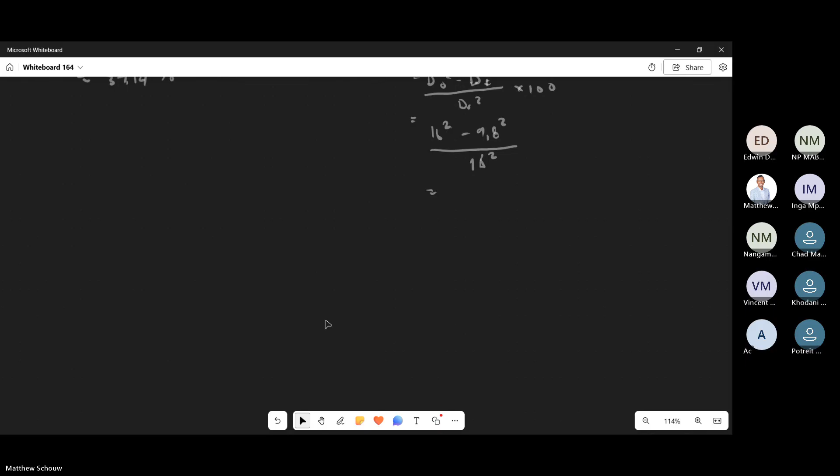See what I mean? So initially the area was a certain amount, let's say 16, measured with a vernier, right? So that diameter squared, minus, we put it back together, we measure that small section over here, and that is 9.8, right? So that's 9.8 squared, and we're just dividing by the initial over there, squared again, times by 100. You with me? So before that, 16 and 9.8.

Sorry, it's the maths that's messing me, so from pi d squared over 4, pi d minus pi d squared over 4, that's the math I'm trying to work out now. But at the end of the day, you get d minus d squared. It's not crazy, remember we're just taking pi over 4 as a common factor on everything. Correct, yes, sorry, twisted a little bit.

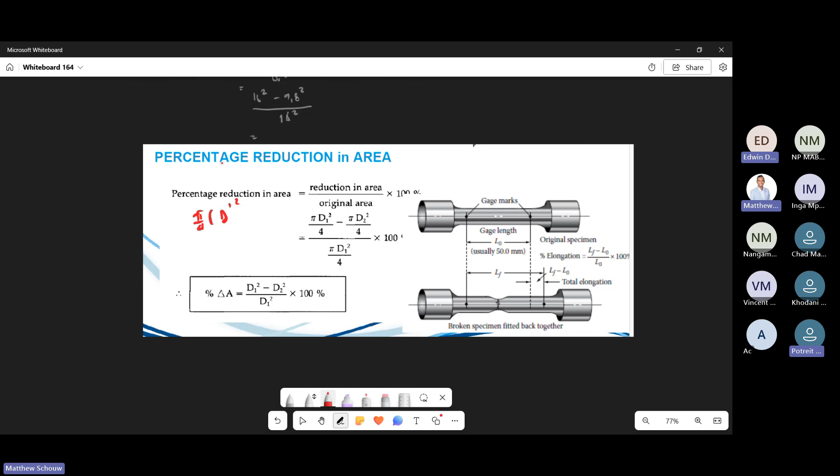Oh cool, gotta work on the rusting. No, it's all right. You'd be surprised how much people have that rusting then, and you're just brave enough to ask. Yeah, definitely, so just get me that reduction area.

Is this Chad the one who's been working with me? Vincent, you've been quiet, eh? Chad, guys, 8.75. Nah, it can't be 8.75, make sure you're squaring your values, eh. Yeah, exactly, 62.48. Thank you, Khodani, 62.48, yeah.

Colleagues, I can just tell you something about strength of materials, it is a hands-on sport, eh, you know what I mean? There's no way you can just listen to me and talk, you got to be involved in this thing. It is not a last minute thing, you know what I mean, last minute I can squeeze in some stuff, just forget about it.

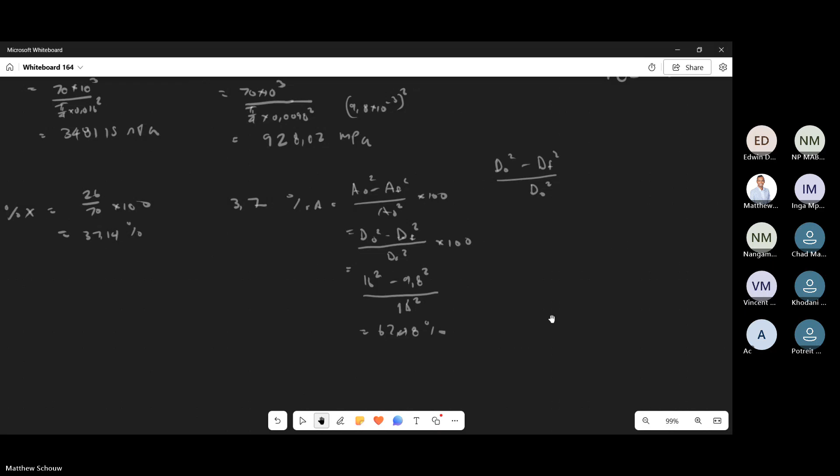We all get this. Is it clear? Any questions? Yes sir, talk to me. Can you hear me? I can hear you, but I did not understand the 3.4. No problem.

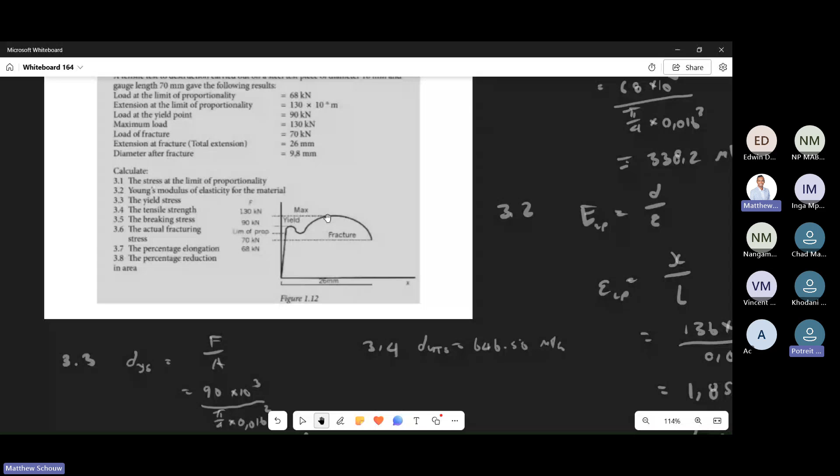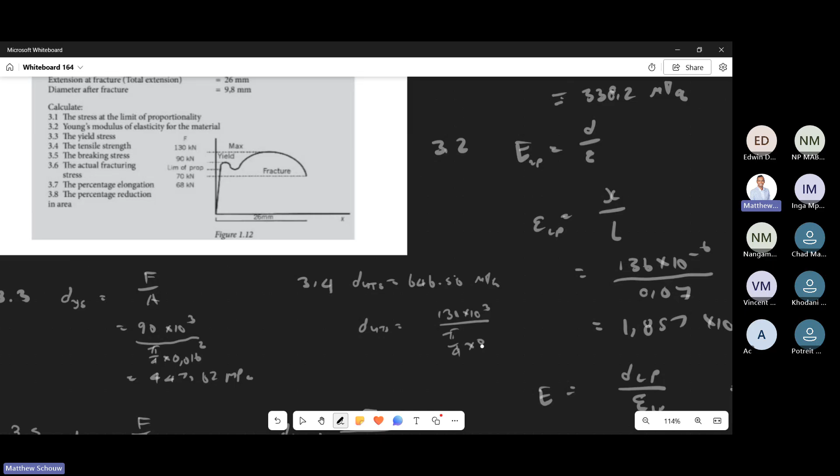So for 3.4, you're taking the maximum load. In that case, the maximum load is 130. So that's gonna be 130 times 10 to the power 3 divided by pi over 4 times the original area, 0.016. The key is you're looking at the different loads, so the UTS is linked to the maximum load.

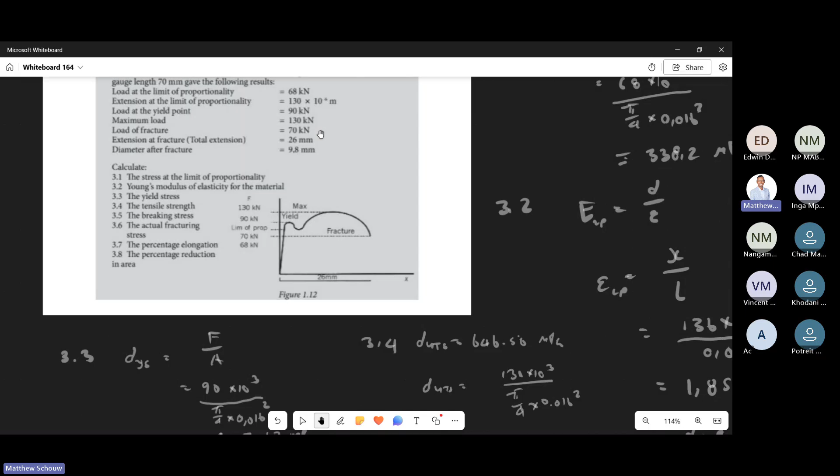One question sir, before we move on - is this in the test? Yes. I don't answer such questions. Thank you, just asking. Make sure you know how to do it, make sure you know how to do everything, okay, you'll be all right.

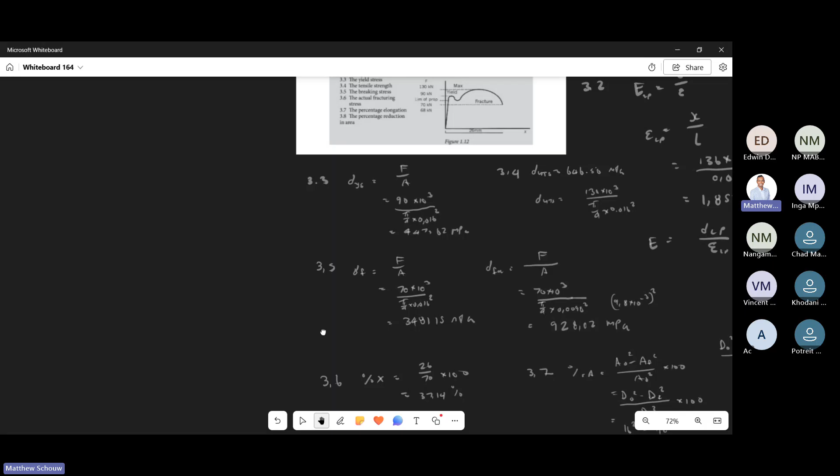You guys find this difficult, eh? I want to explain one more concept, but it seems like people need more practice. So what I'm gonna do now, I'm going to a past paper now, and I want you guys to start solving this while we're on the session. Ask whatever questions you need to ask, it's basic practice right here.

Okay, can you see the question paper? Sure, thanks Edwin. Yes sir, right, 24 marks, you see there? Can you see how it's typically given? Yeah, can you see it? Okay, I can see it sir. Oh thank you. Okay so guys, try this one.

I'll work out the values while we are. Can we do this one quickly? Can we do it in how many minutes, Edwin? Give us a time please. You asked me 30 minutes sir. No, no chief, come on man. Give us about 10 to 15 minutes, that should be enough that we can figure this out.

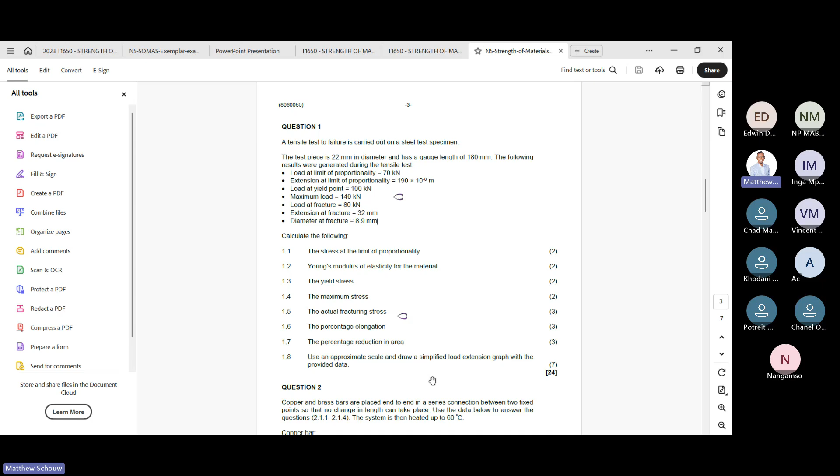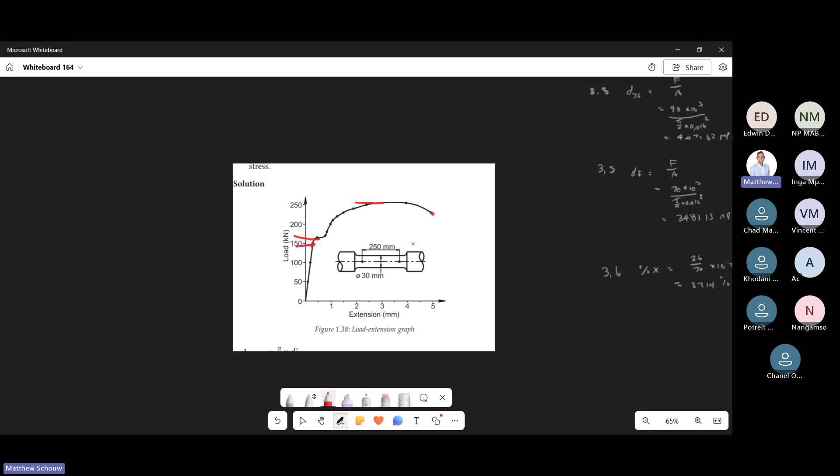Obviously, I want you to go over this yourself, but this is the standard graph they want for that particular question. Not the bulk in the middle? No, not the bulk. That's a specimen. Yeah, ignore that. Yeah. Okay. That's millimeters. So there's no pascals in there. Yeah, okay, that's okay.

A lot of you guys are rusty, so once you warm up. And then we just need to label it. Yeah, label it like maximum load, exactly, yield point, and the lower yield point, the higher yield point. 100%. You got it. That's in your book. All I can say is don't approach the subject like a copy and paste subject. There's a lot of mathematics. What gets most students is not the understanding, it's the mathematics.

But in closing, before I take questions again, guys, print out the formula sheets, go get a past paper, print those formula sheets, make 4 copies, keep them all over. Get used to the formulas at least. I know that's very important for you guys. And then make sure you're practicing everything from 2021 to 2024.